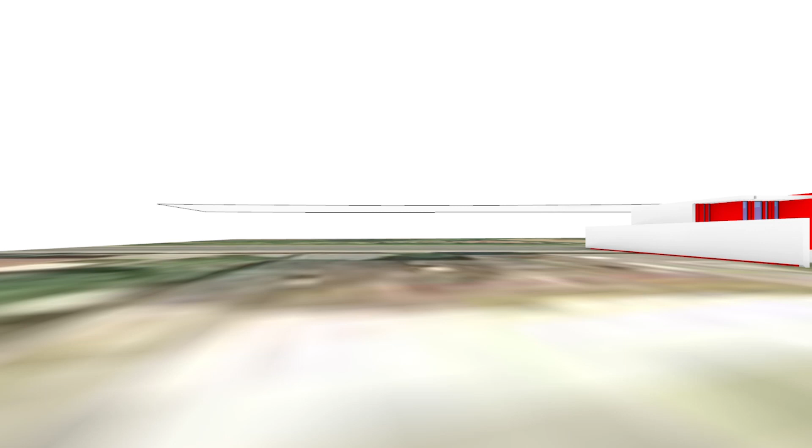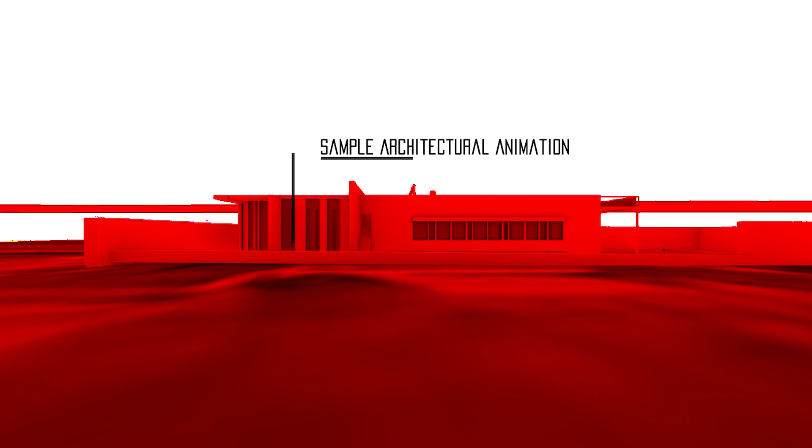This is Rhino, what I'm showing over here. I'm just really quickly going to go over a way to make a video out of Rhino, besides the videos that Beina sent out. I'm counting on everyone having followed those videos that were added as links for resources to create frames in Photoshop, as well as assembling those frames into compositions or videos for After Effects.

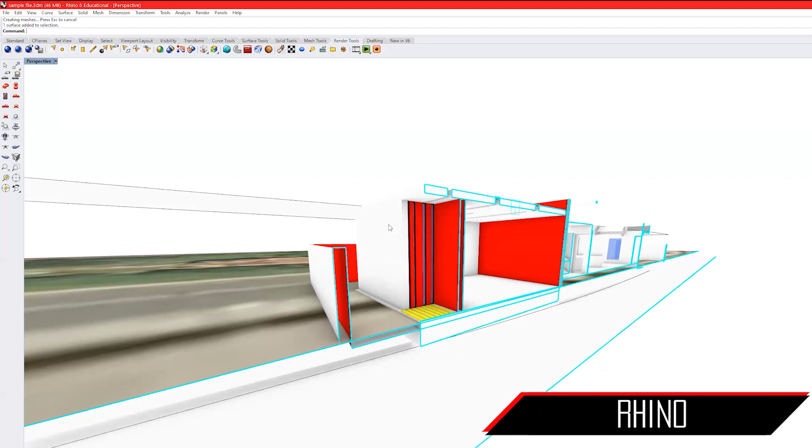All right, so right here in Rhino, I have a very simple model with a clipping plane to trace a section. I'm going to export a quick little clip using the render tools, working here with Rhino 6. If you have a Rhino 6 model open, you can follow along, and I'll check up on you guys. If you don't have a Rhino model open and already have your frames and clips, just take notes on what commands I'm using.

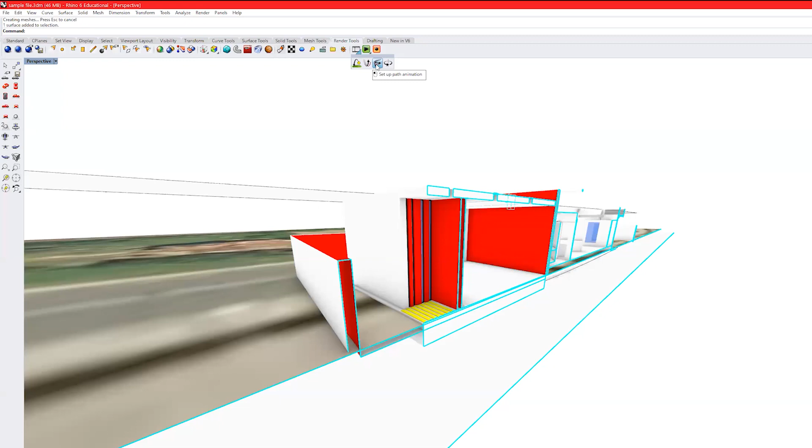So here for render tools, if we go on our main toolbar under render tools, we have our animation tools over here for preview animation, various previous frame, next frame, you can control frame by frame. But mainly we want to go over here where the clip is, and we have different ways of setting up movements through the model: a fly-through animation, a path animation, and a turntable animation.

So I'm going to do a path animation. Checking the command line up here, it says select a camera path, curve, or point. So it's going to ask for a camera path and then a target path.

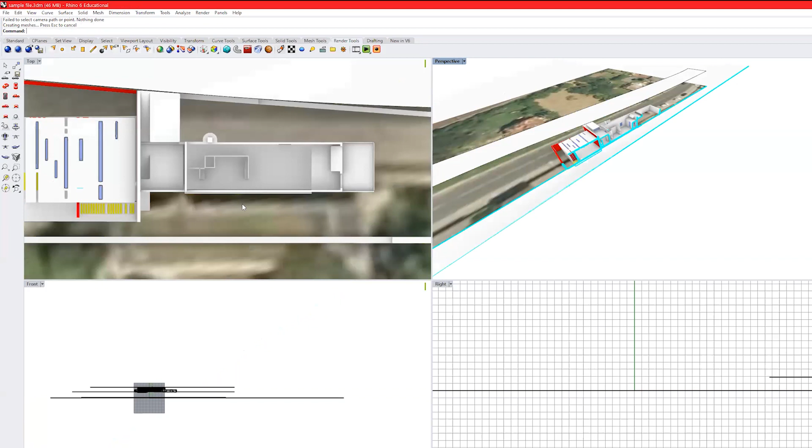Since I just want to pan through the project, I'm going to go into a top view and simply draw two lines for where I want the camera to go through. I'm just going to copy the same line over.

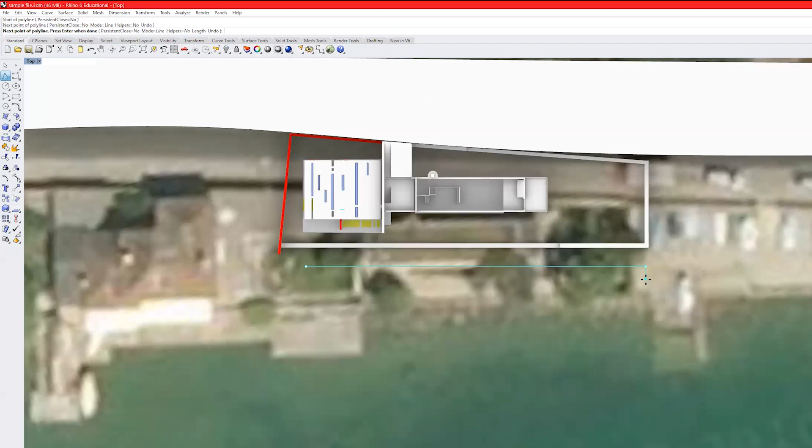So this right here is where I had my camera set up earlier for the clipping plane, so this will be where the camera is located. The camera will move from one side of the line to the next, and it'll start wherever you start drawing the line. So if I start drawing the line on the left side and drag over to the right, that's the movement path for the camera.

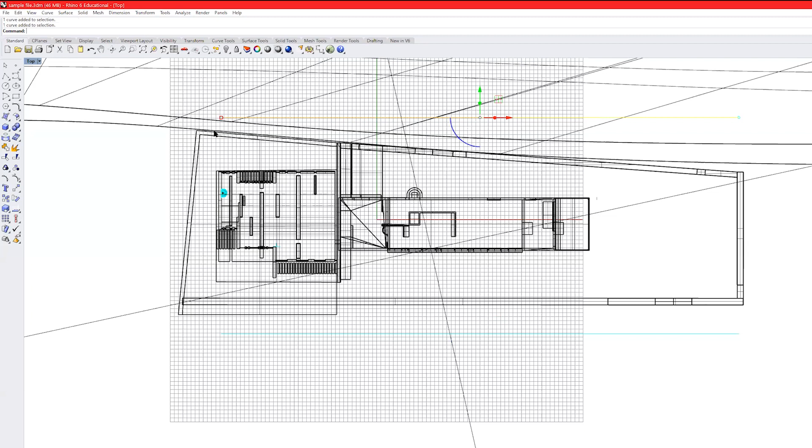I want the target path to be the same, but I'll simply copy this line and place it behind the building. So the camera will be positioned in this first line down here, and it will be looking at this top line—well, not top line, but behind the project.

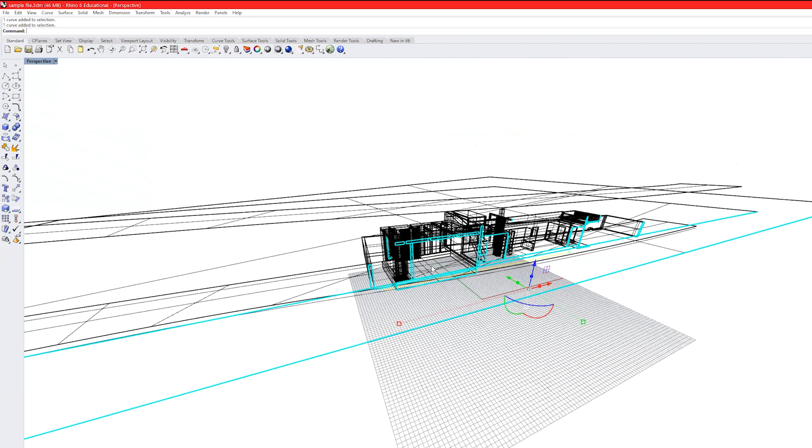Next, in 3D—I lost my line, I'm going to go back to top view to select that line. In 3D, I'm going to use the gumball tool to drag those lines up and bring them to the height where I want them located.

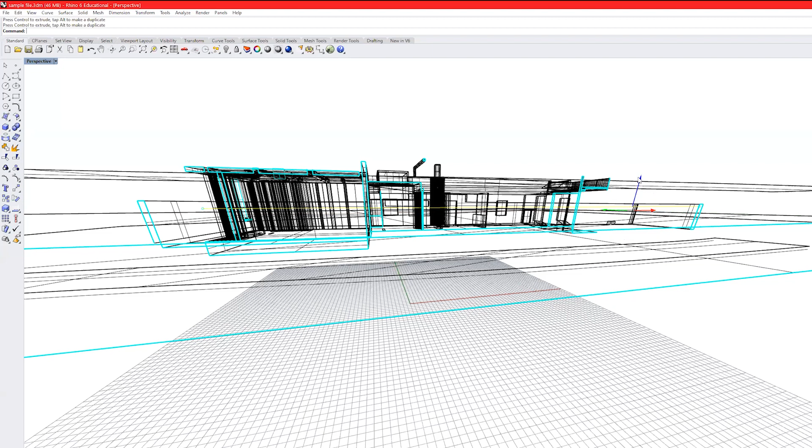To look forward, I'm just going to eyeball it, but you can always make it between 5 or 6 feet if you want it to be at human level or human eye level. And that looks all right there. I'm going to my shaded view to make sure, and my line is right here, so I want to make sure I back it up.

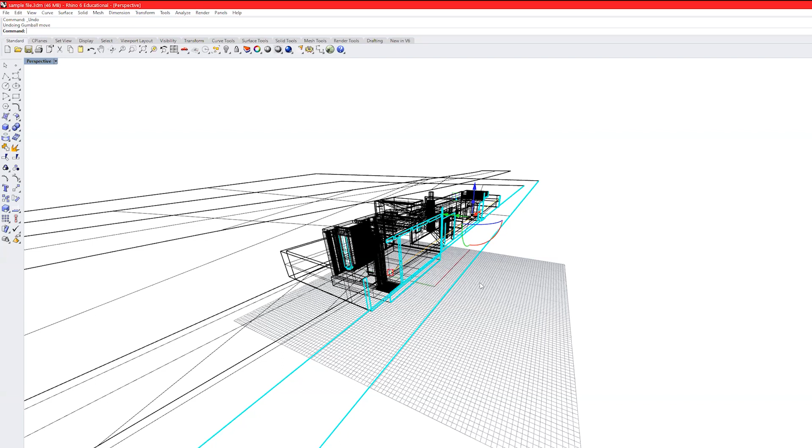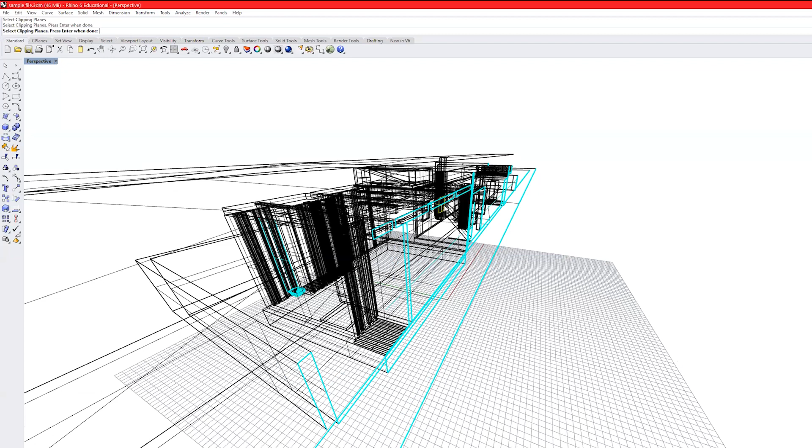Why is it disappearing? Oh, it's behind my clipping plane. So if you have a clipping plane and you're not able to see your camera path, like it's happening with me, I'm just going to type in the command disable clipping plane, and then I'll have to select the clipping plane. I can see mine is right here, but if you don't happen to see yours, you can select an area where that clipping plane might be, and you'll only see it highlight there. So I'll disable that clipping plane, and now I can see my camera path is located over here.

And to preview that now, I can go to my render tools—well, sorry, not to preview, to set it up.

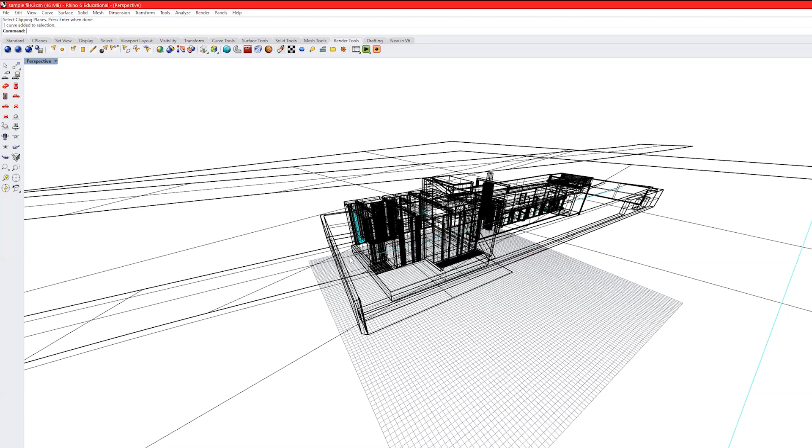Okay. Could I ask, there's someone around that's not muted? I'm just hearing some background noise. Cool, thank you.

The command we want to do here now is SetPathAnimation. Select camera path, that's the one up here, and select target path now. I didn't even have to hit enter, I just selected the line and it automatically took it.

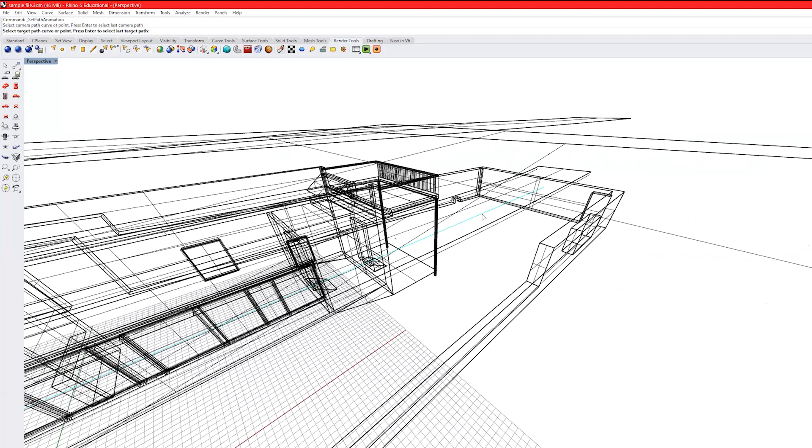Once I select the target path, I get this little window that asks for a number of frames, a file type to export as, and what capture method, so whatever preview mode you have. In this case there's a wireframe, there's the default rendered or full render preview, and then there's my custom ones that I could use.

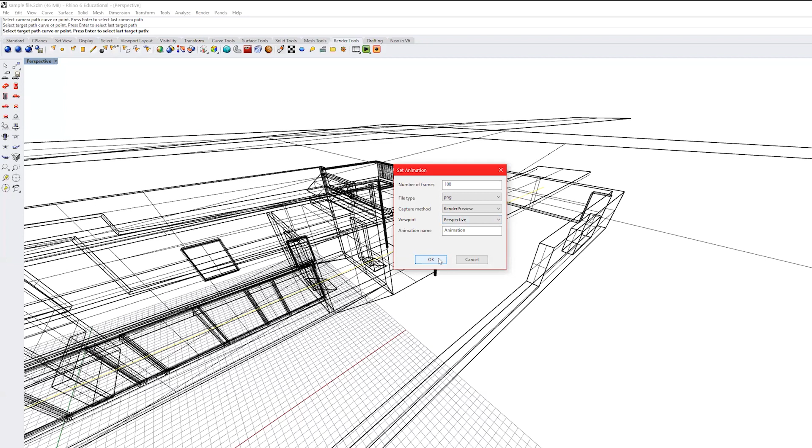I'll go ahead and just put the render preview so that it renders fairly quickly. I'll do PNG, and from the perspective view. So animation name, animation, that's just for when it exports the files.

However, there is a little trick besides exporting frames that I'll show you, if your monitor is high enough quality or if your graphics card can run it, where you can record the animation straight out of Rhino as a video.

But for now, once we set up that animation with that window, over here with the green symbol under render tools, this playhead here, preview animation. And so we see there how it goes through. So it's pretty fast, right?

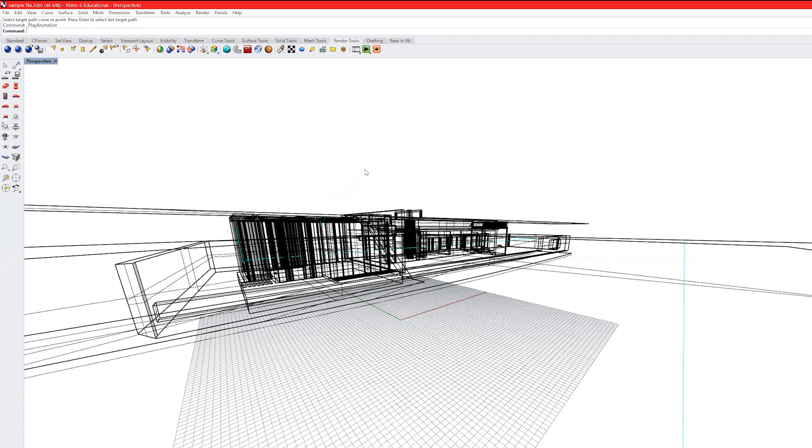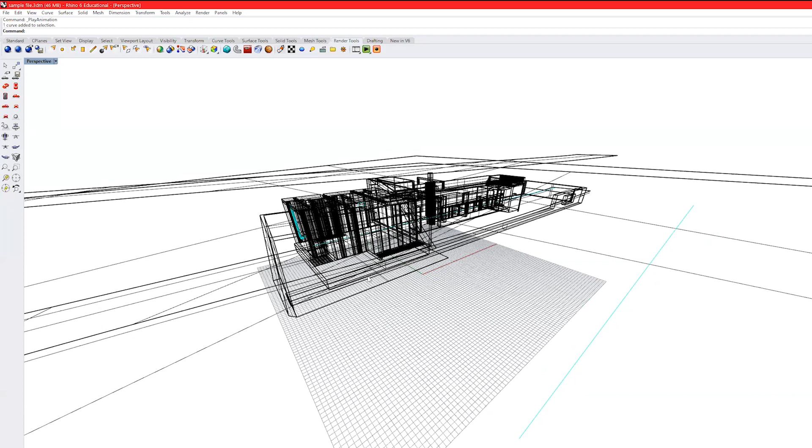And the way to slow that down would be to either increase the amount of frames, but of course it's going to increase the file size that you're going to end up with later. But it's fine, 100 frames for just that pan where you want to use 2 or 3 seconds. If you export those frames, you can then just slow down or time stretch later. So don't be too worried about the speed here.

So you could hit record animation if you're happy with what you're getting. Once I hit the record animation button right here, or you type in the command record animation, it'll say press enter to start recording, but between parentheses you get a target folder, so that's where all your frames are going to export to.

And you want to make sure that you have your project folders organized, and that you have a folder for each animation that's going to be composed of frames, or every video that's going to be composed of frames.

Any questions so far? I know I'm kind of maybe going a little fast. If I am, and you'd like for me to slow down, let me know. I just want to get this so we can get into After Effects and start putting these things together.

Nope. All good? All right. We'll be moving on to After Effects now.

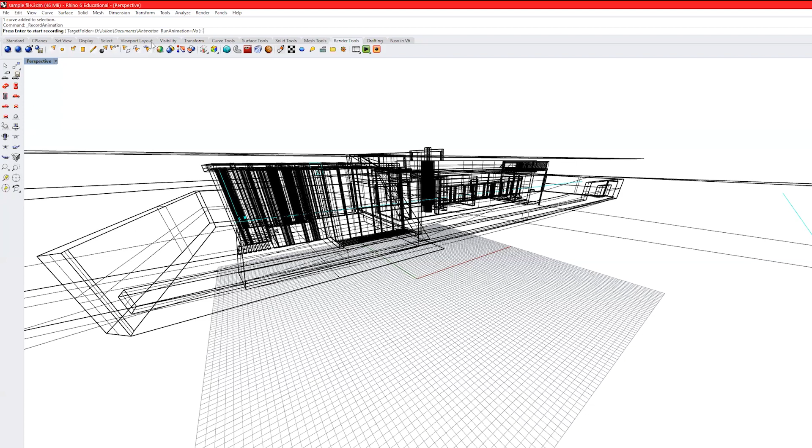Okay, so I'm getting questions here. I'm going to show you how to set up the path animation again. So when I set up the path animation, and the command starts up, I select camera path. I'm going to select that first curve over here, that's going to be my camera path.

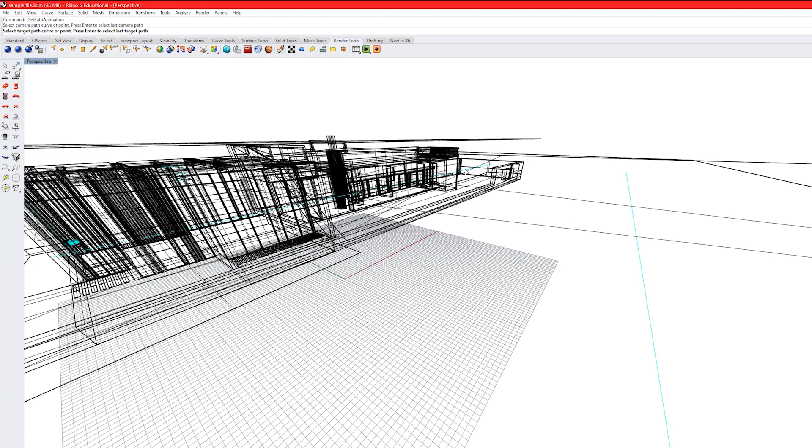And then after I set up my target path, that's when the animation box pops up. It doesn't need to be a straight line, it could be a curved line. So if my target line over here, I'm going to bring it out over here just to edit it.

If you're not familiar with this command, you can do insert knot, and what that allows you to do is add a control point to a curve. So this line only has 2 control points at the ends, but the insert knot command will allow me to place a point along this curve, which will allow me to control that curve.

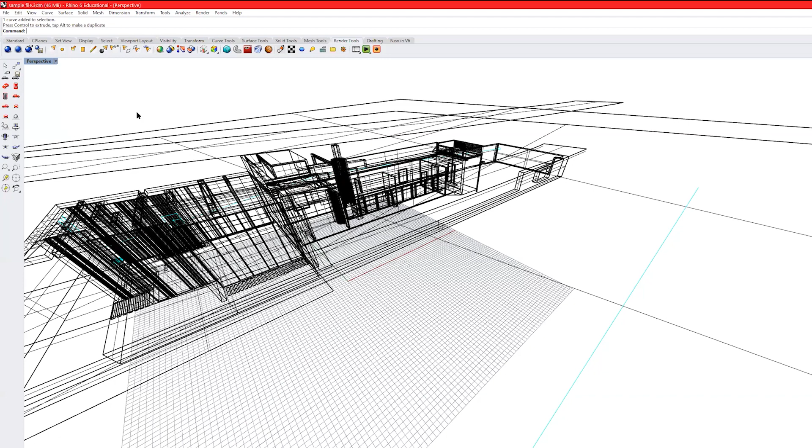So then I can select that point, and if I move that point out, I can create an arc. So my camera path could still be a straight line, since I'm doing that section and want to keep that a straight line, but I can curve my target path, as you see there.

Julian, there are a couple of questions on the chat, but they can't ask you because they're on mute. So I don't know if you can, or maybe you can answer them at the end before we move to After Effects. I've tried to answer some of the questions.

How to slow it down, I'm about to get to. How to get the box where the frames are, I answered. The line doesn't need to be a straight line, as I'm showing you now how it can be an arc target. Is there something else I missed?

No, that's all. Sorry. Thank you. No, it's all good. Thank you.

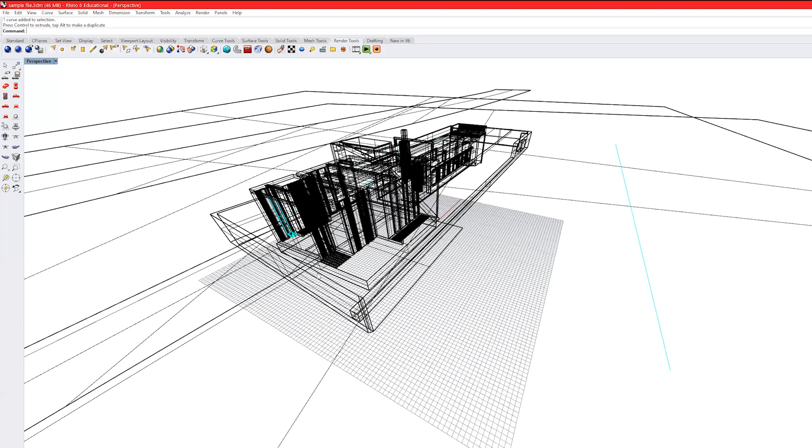I'll go ahead and set this path animation once again to recap those questions, as well as set up a new animation where we now have, well, it's not an arc because it was a line, but I'm fine with this. It's a 2-segment polyline. So how to slow it down? I have 100 frames, so you also want to think about how you're formatting this.

At this point I'll start to address a concern from Neil Leach. Sorry I didn't answer through email, but I was looking into this issue where there's some latency through Zoom. Looking through the Zoom support pages, they optimize videos when played in full screen, so you want to play your videos, if you're the presenter, in full screen to get the smoothest frame rate possible.

But you also want to be familiar with frame rates. Movies you typically see in theaters or on TV go at 24 frames per second. If you're familiar with animated series like anime, they go at 12 to 8 frames per second. 30 frames is smooth, and the human eye sees at around 60 frames per second. Keep that in mind for how many frames, how many seconds your animation is going to go for.

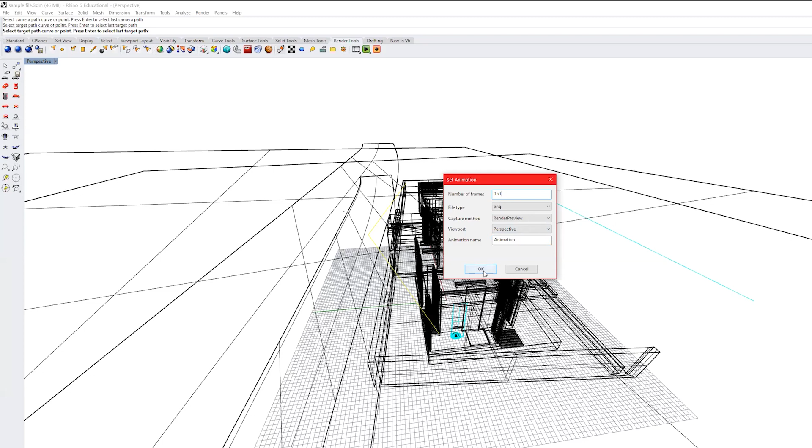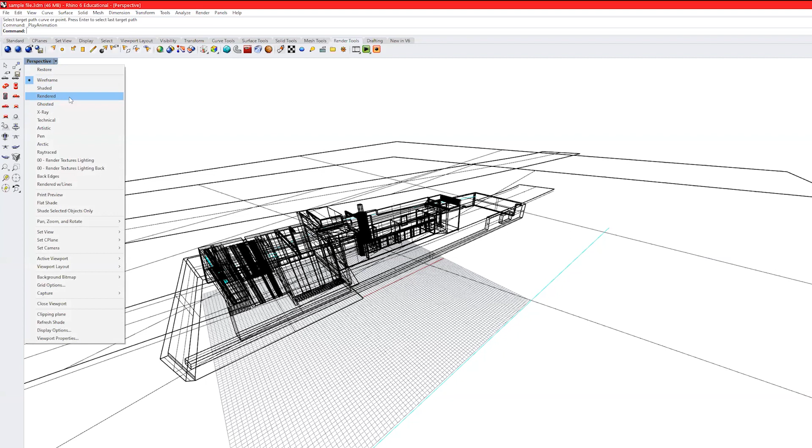I can play through the animation now, and it's a little bit slower just by adding 50 frames. If you're fine with taking up more resources, you can add more frames. But note that was being previewed in wireframe mode, so you want to make sure that if you're doing your preview, you want to see it in rendered view.

You have to go a little fast, but here's a trick. Instead of exporting those frames by recording the animation, what I do is use video capturing software to capture the recording on the screen. I'm hoping this doesn't interfere with my Zoom recording.

You can hit the Windows key on Windows - Windows key plus G on any software - and you can start recording that software you're using. On a Mac, I'm not sure if there's a native way to record, but you could also download software to record.

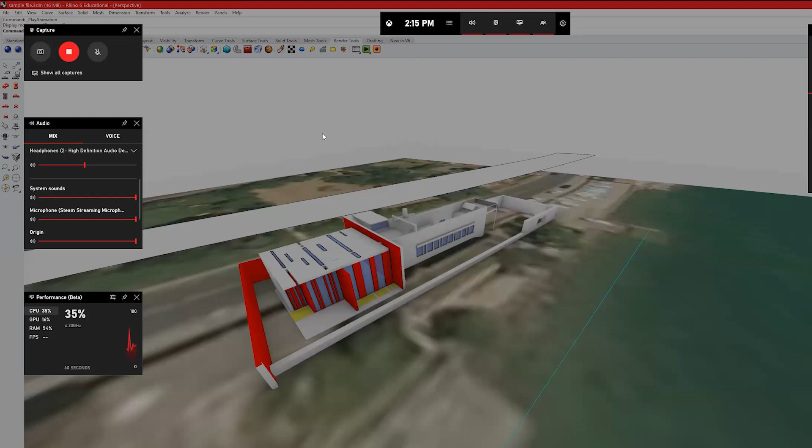So once I'm recording my screen right now, if I play or preview the animation, I'm going to extend my line a little bit past where I would want the animation to start.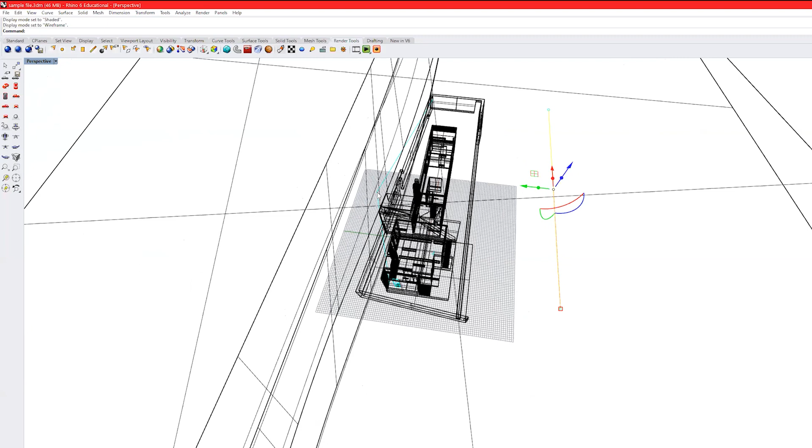I would only recommend this if you're maybe running out of disk space to be able to export more frames to slow down the animation, or again, if your rendered view is good enough on your computer, like it might be with mine.

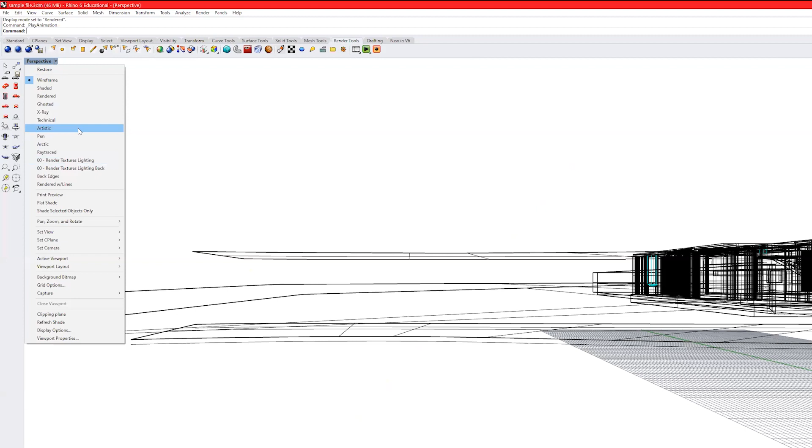When you play the animation, it's going to start playing in wireframe. But if you quickly click on the drop-down menu here for preview modes, I can switch to rendered view, and so now the animation will continue to play in rendered view. So right now I'm recording what I'm seeing here.

Can I get an okay from people in the chat that there's no interference with me recording this clip on Rhino and setting this up right now? Okay, cool.

If you're using V-Ray, will it record with the same material? Yes, you would have to set up your renderer for your animation, set it to be V-Ray, and then V-Ray will render every frame that you export. That's a lot though, so for a 5 to 10 second animation at high quality, it might take all night.